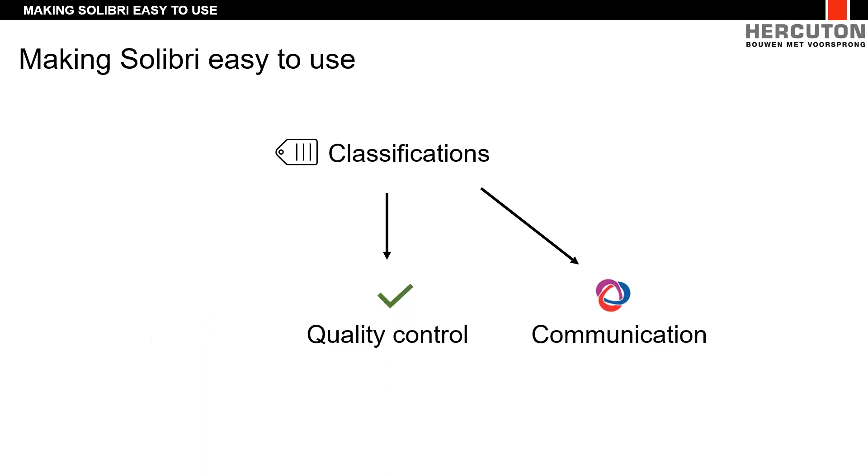We do that through classifications. Classifications is our starting point always. To get information, to do quality control, and to communicate. Classifications is where we always start. Today we'll focus on quality control and communication. And so with quality control, how we set that up in our company, we have a rule set per building aspect or discipline, if you will. The classifications are the base of all the rules. Again, the classifications is where we always start.

So we check procedure, the quality of the data, the difference of production and design models. And this is a very important thing in our company as well. We're talking about design models and we're talking about production models. There's a big difference there, obviously. Check the model itself on specific quality demands from our side, and then check the model or clash the model with other models. That's our procedure. We're going to show that later on in the demo.

And we're going to talk about communication today. We use a live connector to connect to BIMsync. BIMsync is our online platform, our CDE, Common Data Environment, that we use to share all our data. It could be any other platform. We use the buildingSMART BCF communication standard. This is something that me and a couple of other guys here in the Netherlands worked on, and it has been adopted by buildingSMART International. We're going to go to that later on as well. It's a sort of a manual.

I'll show you later. We communicate per building aspect per discipline. We create issues directly from checking results. That will save a lot of time, and the quality of those communications will rapidly increase by doing that. I will show you that as well. And afterwards, you can create other issues manually. This is the BCF chart. We can now go to the live demo. I promise I will do this quickly, and I think I flew by doing this presentation.

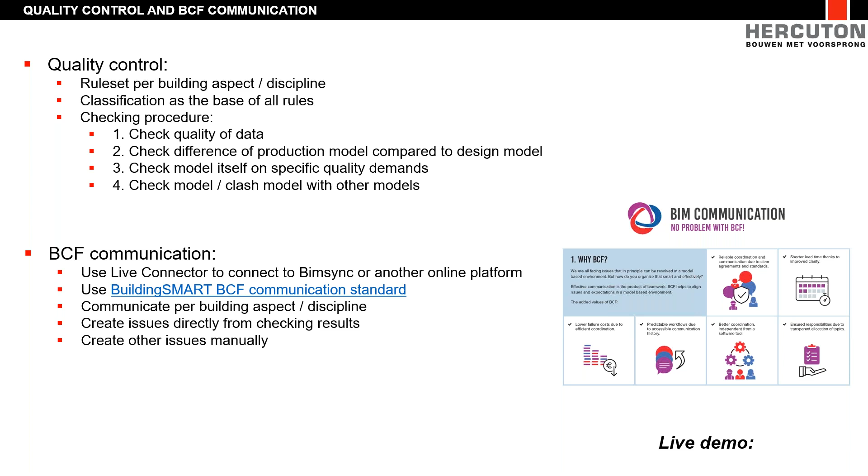Are your rule sets based off BIM basis, ILS? Good question. Yes, I will show you that. All right, let's go to the live demo so I can actually show you what we are doing. I assume that you all see Solibri right now.

Yes, it's okay. You're seeing this, Maya, as well? There are more questions. Yes. Okay, now I see that.

Are there other rule sets you use to detect the difference between production and design models, I assume? Yes, I will show you as well. I have this, and this I'll show you in the demo. Also, what is the production model? That's a good question.

So how we look at the construction or the engineering process is, in the beginning we have a design, and that's our design model. It could be an architectural model or a structural model made by your structural engineer, and that's the basis of your design. Later on, when the design is approved by the client, we go to our suppliers, and they supply us a production model, which is the production of a steel structure or a prefab concrete, those kind of things. So that's the difference between a design model and a production model.

Design models we do ourselves internally because we have architects and engineers. We design a building. Production models are created by manufacturers. I hope that is clear. And I will show you later on how we compare those two models. We've answered most of the questions. There's one, but we can also answer later.

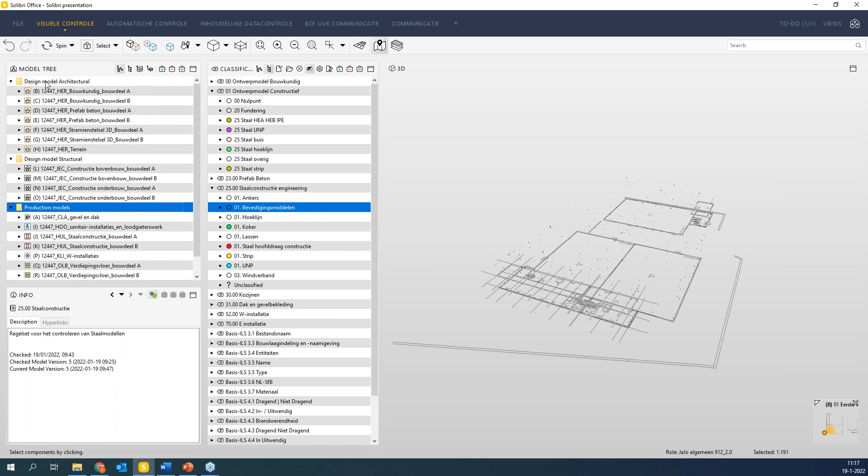Great. So I talked just now about design models and production models. In Solibri, we put those in categories, so we can switch them on separately, and that saves us some time. In our company, this is how we always work. We have our design models and our production models separately. It's very important.

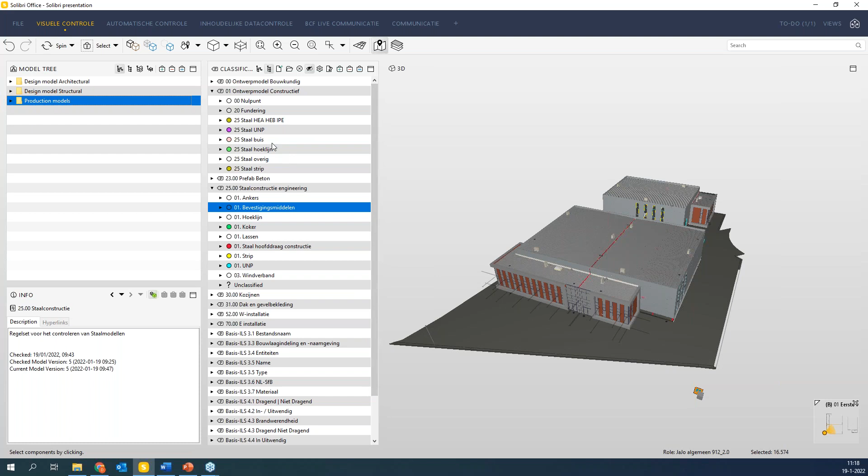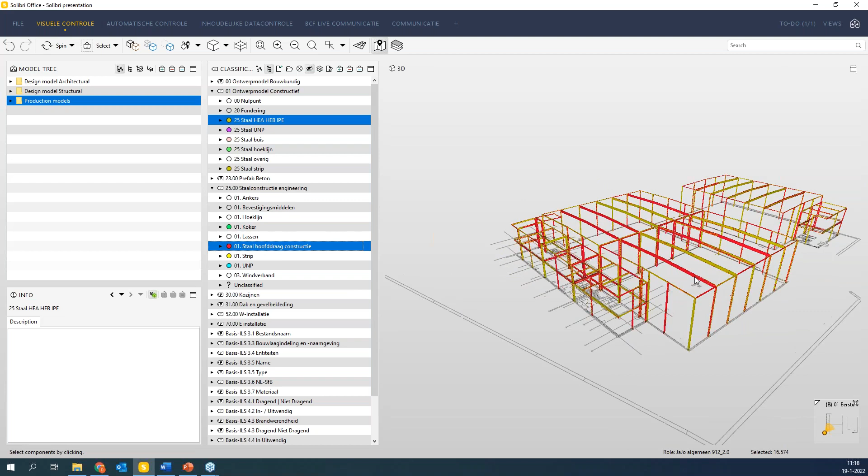Then again, like I showed in my presentation, we're talking about classification. Classification is the base for all our rules. By using the classification, you can already do some checking manually. Sorry for this being Dutch, I cannot change this right now. So it says here design model structural. I can have my main steel structure here. And this says steel structure engineering, so these are production models. I can also set that up to show those same. So now I can manually see if it's going okay or not. Later on, I'll show you the rule sets, obviously. So this is how we use the classification.

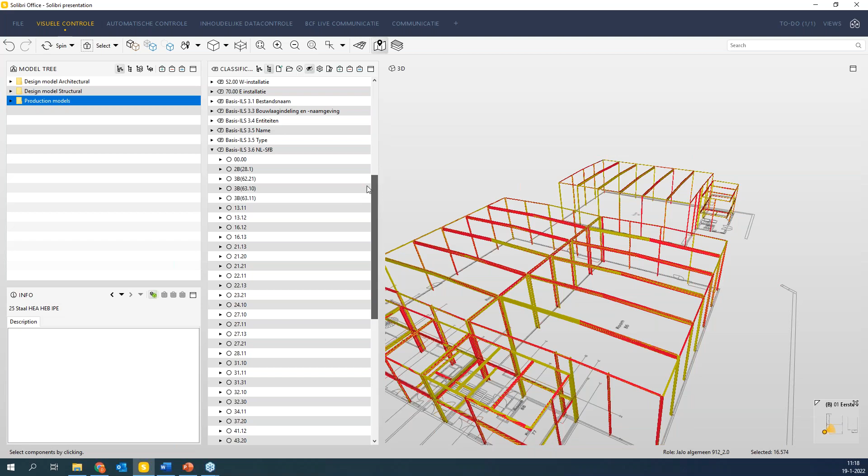Somebody asked me about the basis ILS. You see that over here. We can check our models within the classification to see if these models are approved. And already I can tell you they're not, because this data isn't properly done. You can check out the material. This looks like a little bit of a mess as well, and sometimes they apply the rules, and sometimes it's just difficult. And honestly, it is really difficult to comply with the basis ILS all of the time.

That's mostly on the production side, because some production companies have set up their whole BIM idea to literally produce steel or prefab concrete, and they're not so interested in whether the data is correctly done, which is obviously a little bit of a shame, but that's how it is. And we see that by helping them, they will get better and better. All right.

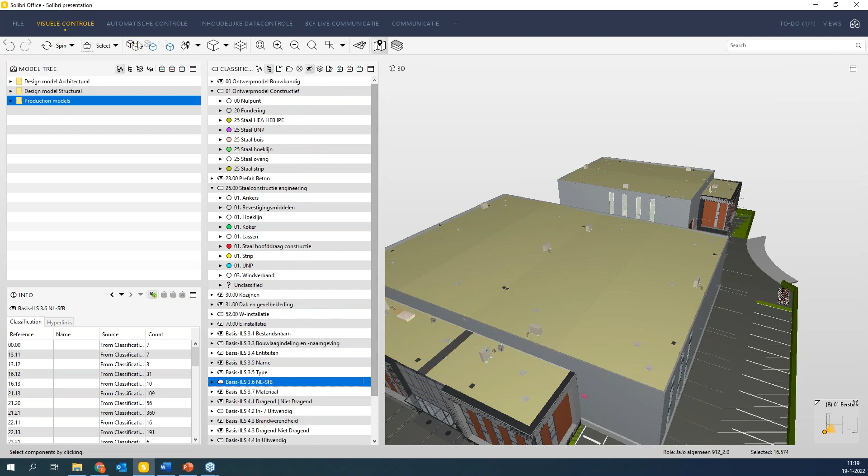Automatische controle, that's Dutch for automatic checks. This is where we are doing our rule sets. So let's go to the rule sets. I already set up a project here. It's a relatively small project for us, but it's good to have some control. As you see, I have some views ready here. These are saved for our entire company. Of the model tree here, and of course our most important ones, the classifications, where we can play around with.

And these are the rule sets. These are only some of our rule sets; we have a lot more. And as I promised in the presentation, these are set up by discipline. This is prefab concrete, and this is steel structure in English. I just decided for this demo to use the steel structure. As I showed you in the presentation, we're talking about the basis ILS. This is the basic data check. Then we will check the differences.

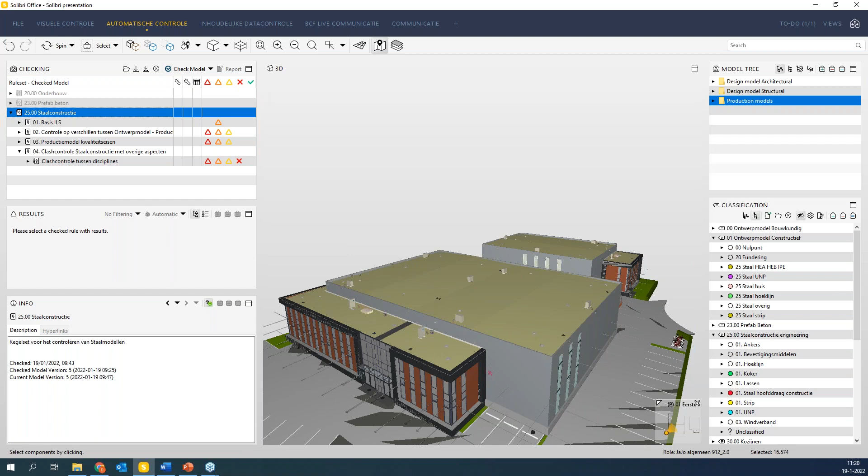Let me translate that in English for you and show you what it says. So, checked on differences between a design model and production models. We will do that as well. Production models, what are the quality assurance? What do we ask from our production models? What do we need? And lastly, we check the steel structure with other disciplines. So our engineering department is asked to do this one by one. And let me go through them a little bit.

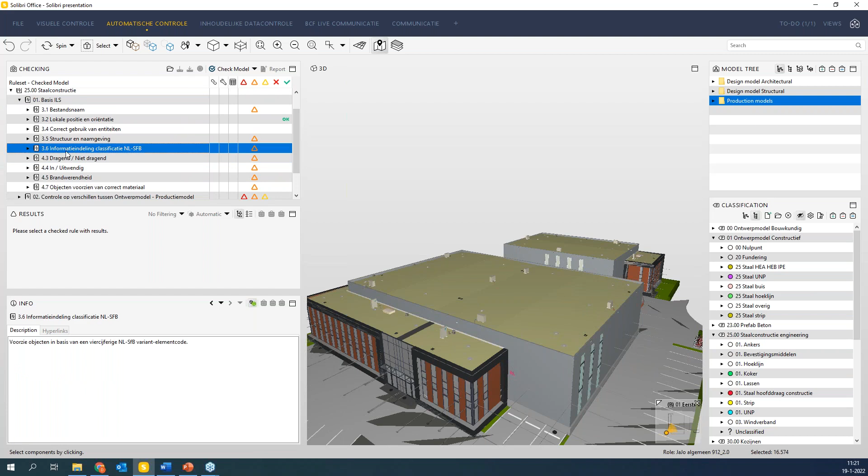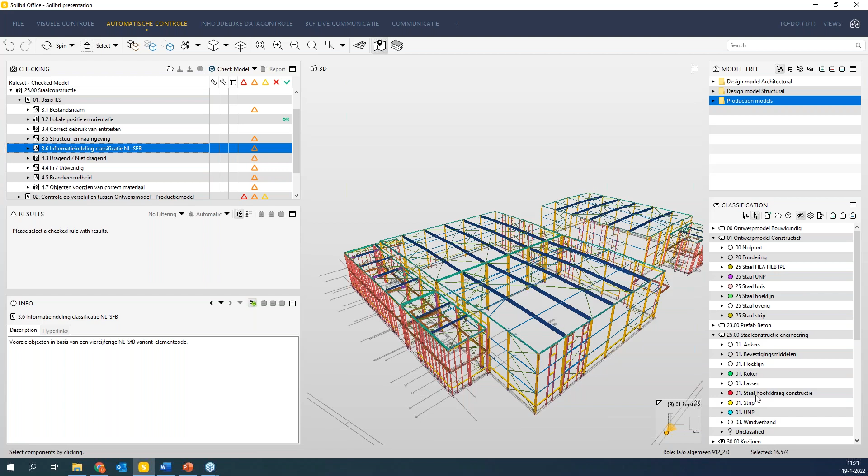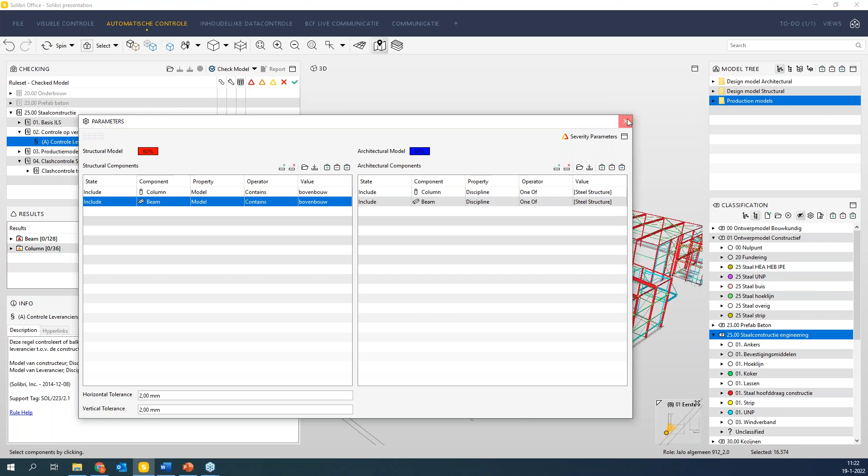All right, one of the questions was design models and production models. How do you guys check that? Well, we created a rule set which checks the differences between the suppliers and what we do as our design company. So this rule set, I can check it here. It checks out the differences between them. Again, you can see here. So I can show you some results. Actually, let me show you the columns. There's a lot of differences in the columns.

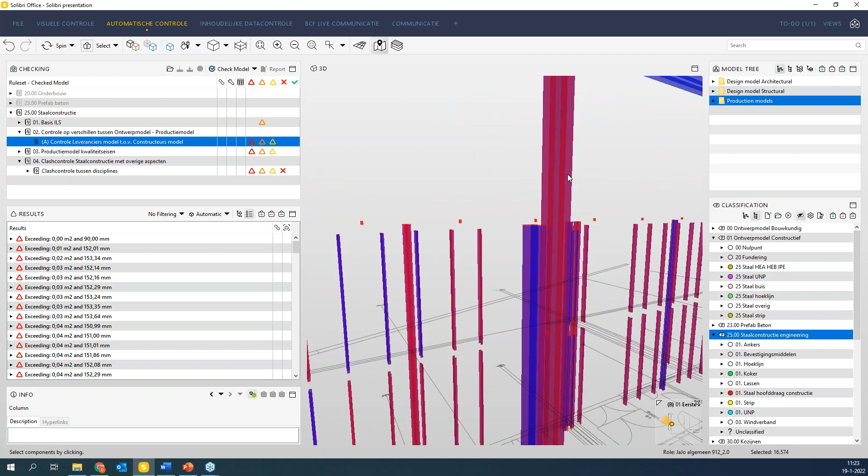I can go by that manually, or I can exclude it. There are more options for doing this in Solibri. You can check out this option, the switch to hierarchy list, because this will show me the results directly. And by doing this, I can judge myself how bad this issue really is. And I can also use a filter, because, for instance, this is not really a large building, but if I feel that it is, I can create a section plane here. And now only this part is showing.

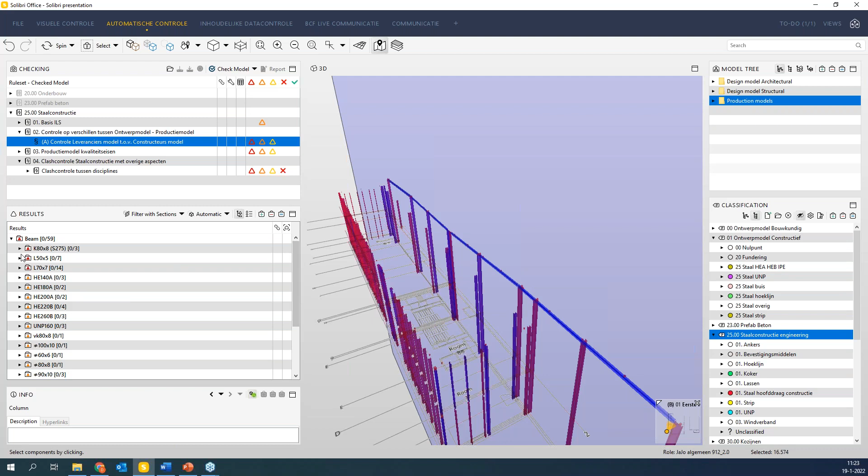Let me go back to this one so you guys can see. You can see the amount here, 128 and 36. But if I use the filter option right there with my sections, it's now 59 and 26. So now my results are a lot less, and I can just check this part, for instance, if this part is crucial, and we'll do the rest later. And so apparently there are some deviations here.

I don't really have to scroll, I can just click on it and I will see the deviation. Now I don't really know what we're talking about here. So again, I'll use my classification, steel structure engineering. I'll add this. There you go, and now I know what they're talking about. It's a bracing. The designer placed the bracing at some point, and the production company moved it a little bit. Well, to me, this is not a problem, so it's okay. So this is how we use the quality check. We check them one by one, and when there is an issue, we'll communicate later on.

Let me see what I was going to do. Difficult.

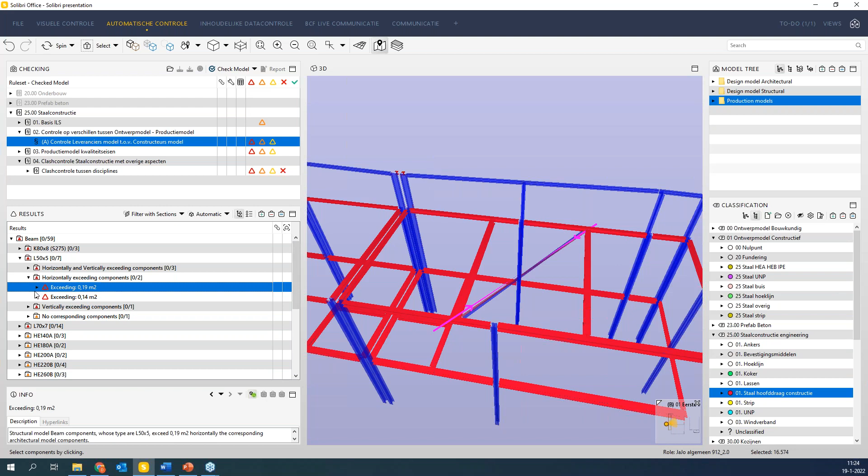All right. So this is how we can just go through it. It looks like a mess, but again, I don't know how many people have experience with these kind of steel structures. The difference between the production model and the design model is literally a couple of centimeters, and this is where the production company adds their plates. I can show you here.

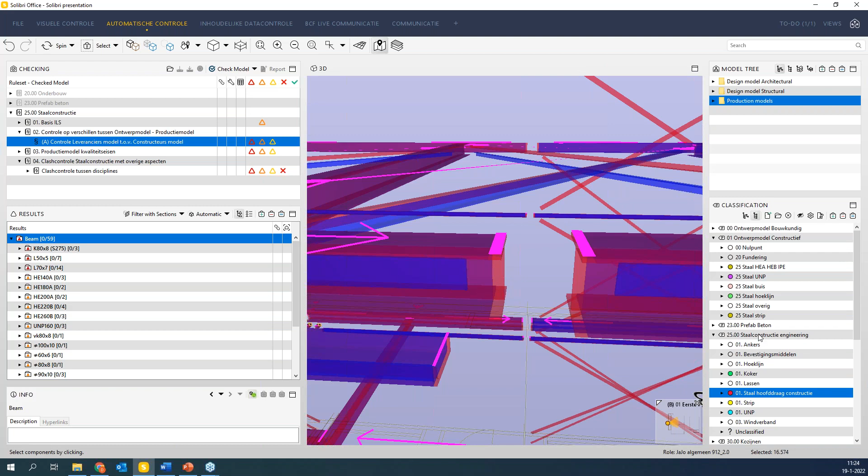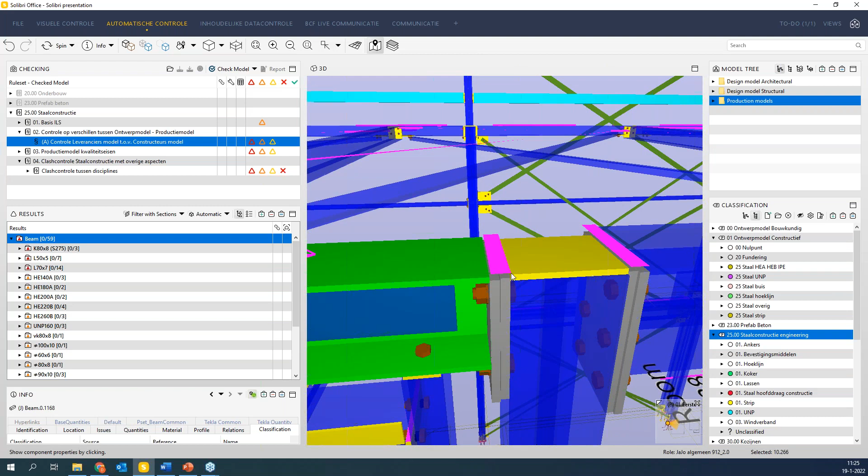So the difference is that these beams are all smaller than the designer created because these plates are added. And you can still see here the pink rectangle that Solibri tells me, hey, wait a minute, this beam is now shortened by this length. Well, that is true, and that's great because that's exactly what we need. So that means that sometimes it could be a false positive checking these things, but because I know how this works, I'm okay with it.

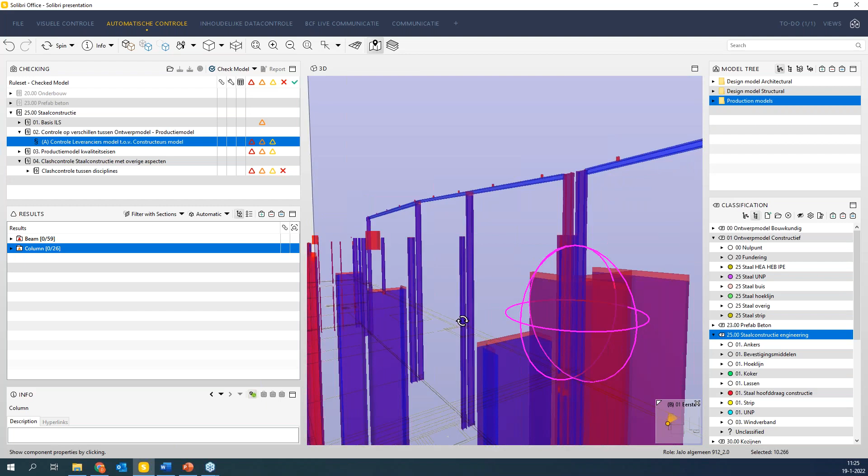So I'm generally looking for columns. Again, they have the same thing. You see the small differences. Looking for columns that are moved horizontally. Because if they're moved horizontally, then that means that our production company somehow decided that this column needs to be placed somewhere else, and that's obviously unacceptable.

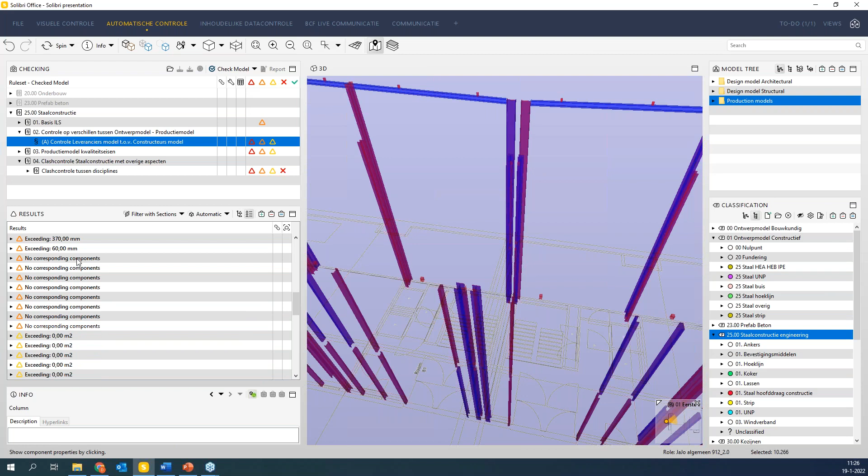So I can do that, and you can check if it's exceeding or it's no corresponding components. That is interesting. So that means that the production company added steel without designing them. All right, so let me select them all. What's going on? All right, so that's wind bracings. So they've added wind bracings. That is something interesting for me to know. And these are exceeding very low values. So I'll generally just check the high values exceeding 2.5 meters.

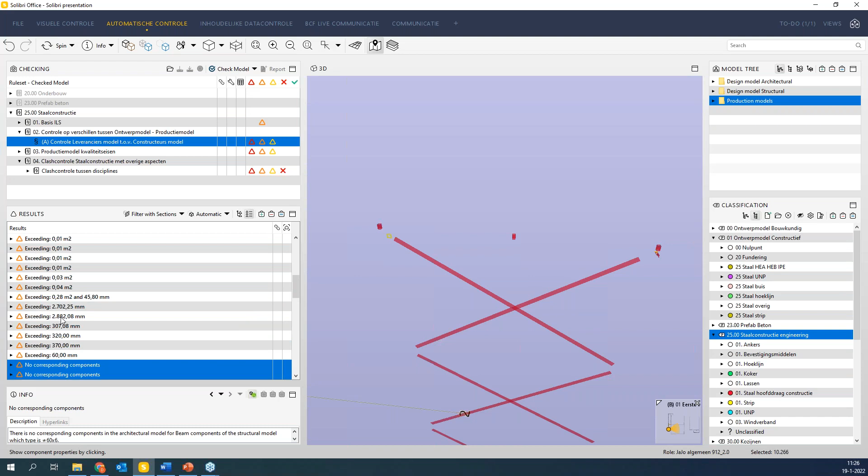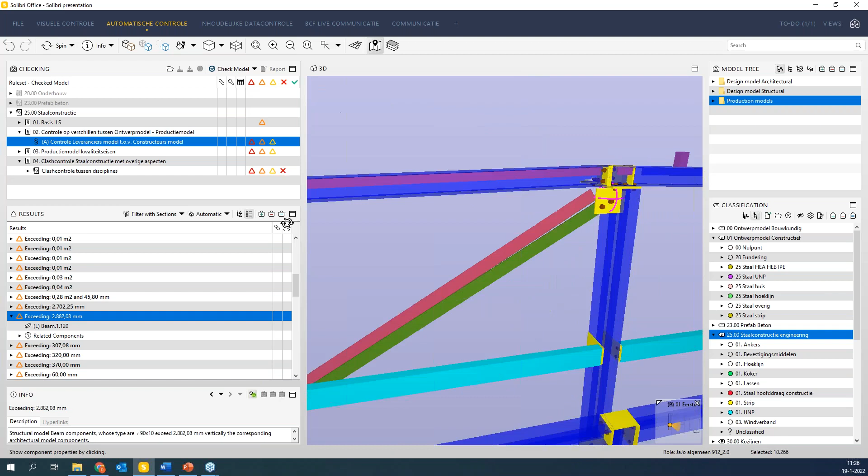That's very interesting. What's going on over here? Let me just add the steel structure again so I know what we're talking about. Yeah, I don't know why it's happening here, but it's good. It's telling me this. This again, it's the same thing. The red is the designer, the green is the production model, and this looks great to me. This is not a problem. But it still is good to check because you never know what is a problem. So Solibri is helping us a lot, getting us insight into this process using the steel structure checking.

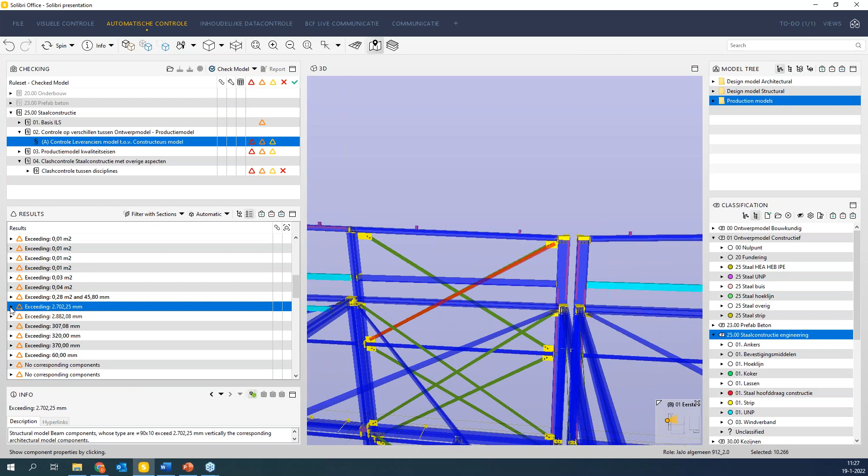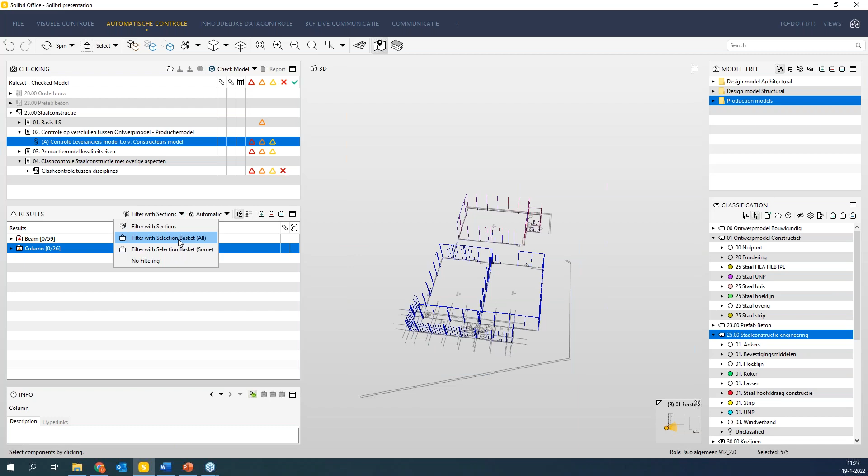And here is the same. It's the same thing. So again, this helps us out. I think it's interesting to use either the beam and the columns checks, and use your filters with the section. You can also use filter with a selection. You can just go select and throw a window here, and then say filter with selection basket, and you'll see the numbers change as well there. And we're just talking about these columns or all the columns. So yeah, that's an easy way to minimize your filters to check out what you're doing.

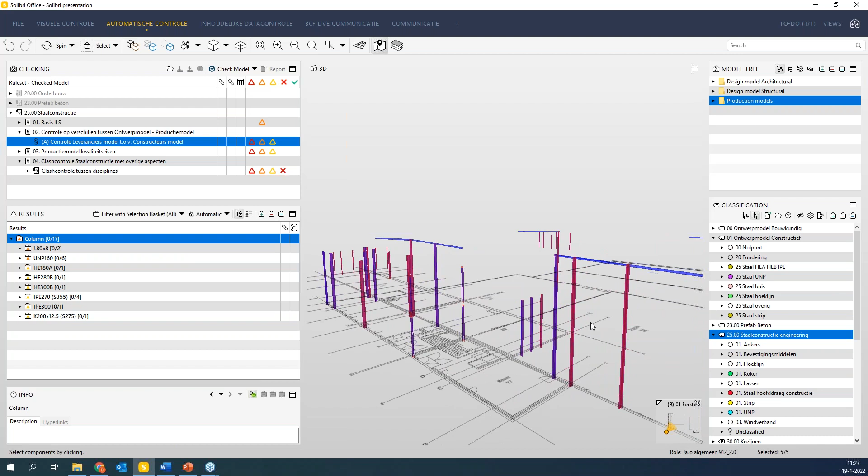Okay, let's move on. So our production model, our own demands. What are we asking for this model? So what we did is within our company, we asked our specialists, when you're checking a steel structure, what are you checking? So we wrote those questions down, and those questions are now part of this list. And you see there's an A or an H behind it. Well, A is Dutch for automatic, and H is Dutch for manual. So there's automated checks and there's some manual checks which cannot be automated.

So what this helps our engineering department is we've created a checklist of what they have to check when a steel structure model is being sent to them. So this is company-wide. You don't have to do this manually every time. Our whole company uses the same rule sets. So for instance, let me take a couple of seconds, like here, this one. This says the bolts need to be in entire centimeters, so you can't have half centimeters length. All results are filtered out. Wait, let me check the model again.

Where are my results? Oh sorry, I've used filters. That doesn't work, obviously. So no filter.

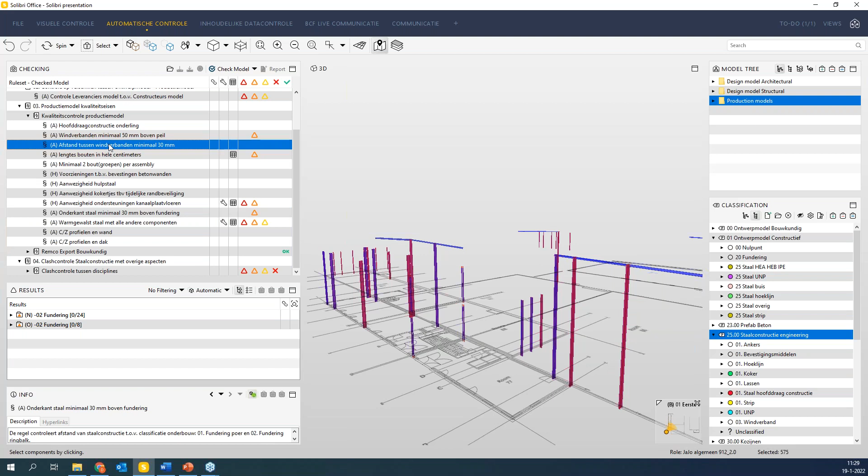There you go. Like the bolts, for instance, it's saying all these bolts have a length of 35, 45, and 55 millimeters. So our engineering department will change that to 40, 50, 60, and 70, because we don't want these half-size bolts for some reason. It's not up to me, it's up to them.

So what we can show you here is that Solibri is not just about clashing, it's also about quality assurance. We want other types of bolts, we can check that.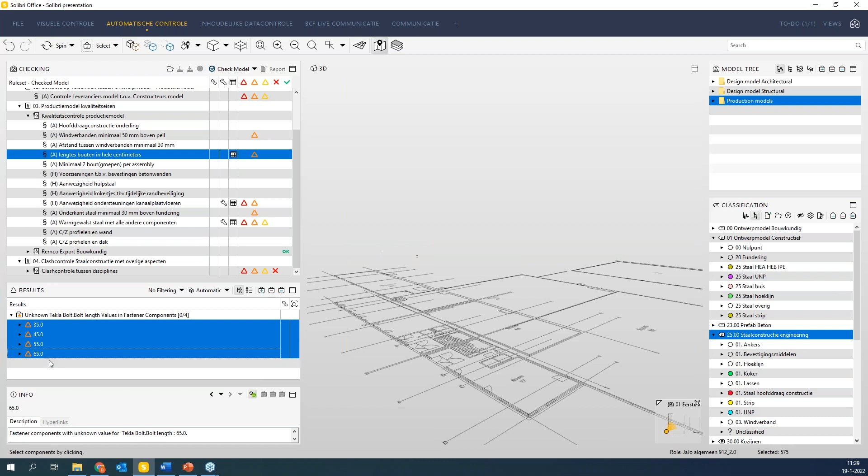This one, for instance, checks that the bottom of the steel needs to be at least 30 millimeters above the foundation. All right, so what's going on? Show me the results. Components are too close. Okay, what are you talking about?

Let me show you. Okay, these are some assemblies, some fasteners. Let me show you how we can fix that. This is a small error in the rule set, so we just change that.

Let me undock the information here first. So this is the information about the fastener. Again, I'll go to classification straight away because I want to exclude them using classifications. We always use classifications. This is the classification steel structure engineering, and this is the folder it's held in.

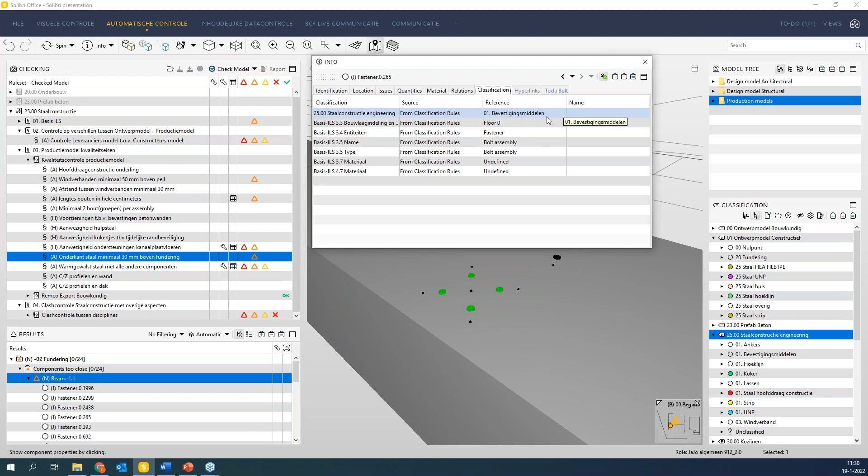So I will exclude that classification. How do I do that? Right click, rule parameter. Here there's already some things excluded, the anchors are excluded. I will double click here, and also add this one.

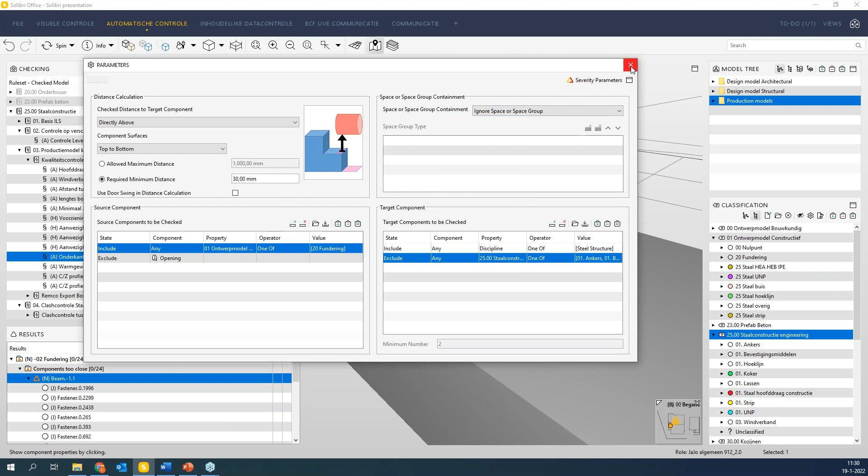It's now also excluded. Close it, check model again. There you go, it's not checking it. It's now completely okay, so we have no more issues. All steel structure is at least 30 millimeters above the foundation, which is perfect.

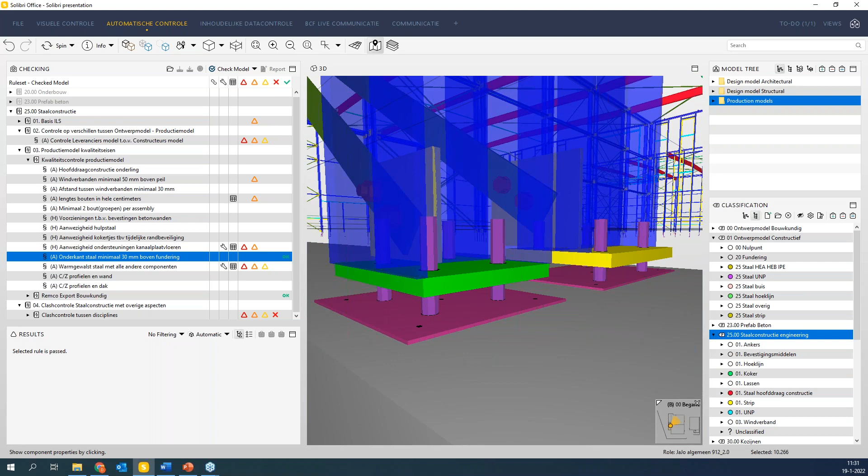And there you go, because I've already excluded these things, the anchors and the assemblies. So the bottom of these plates are now 30 millimeters above my foundation. That's how we use quality assurance for these kinds of things, and I think that's a rather good thing to do.

What else can I show you in here? Let me go on to the next one.

So here we have our clash control with other disciplines so far. Maybe before I move on, are there any questions before I move on? Maya?

Yes, we have received some questions, but I think they can wait until the end, or would you like to answer them right away?

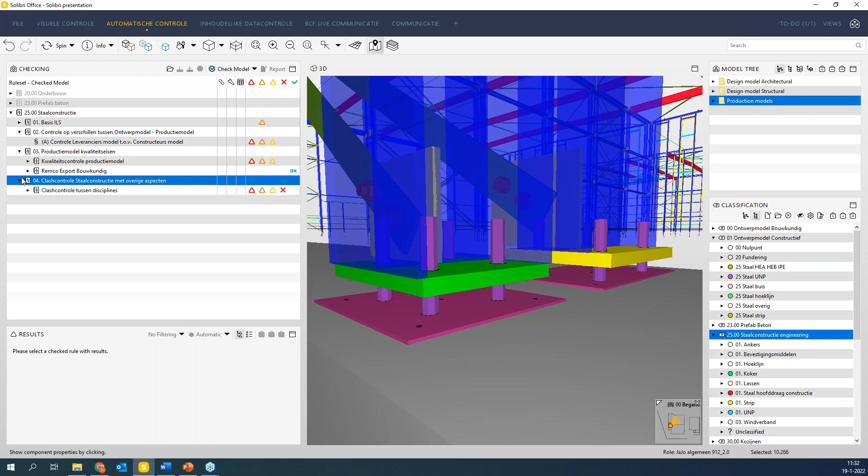Well, if I'm going to, I can do one more. I can just do our final piece, clash control with different disciplines. Let me just do this. I'll finish this up, and I will answer some questions and show them directly.

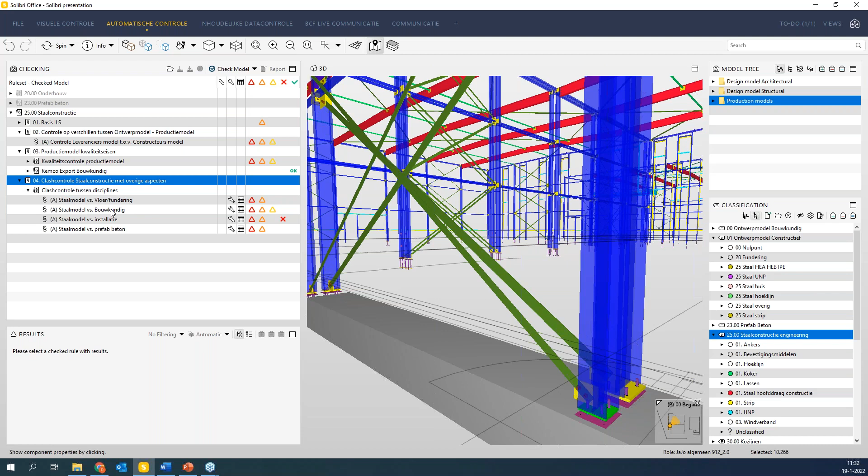So what we do here, I'm in the mode of checking the steel structure, so you see that here as well. We've created some standard rule sets. It says the steel model will be checked against the foundation, against the architectural model, our MEP, and our prefab concrete.

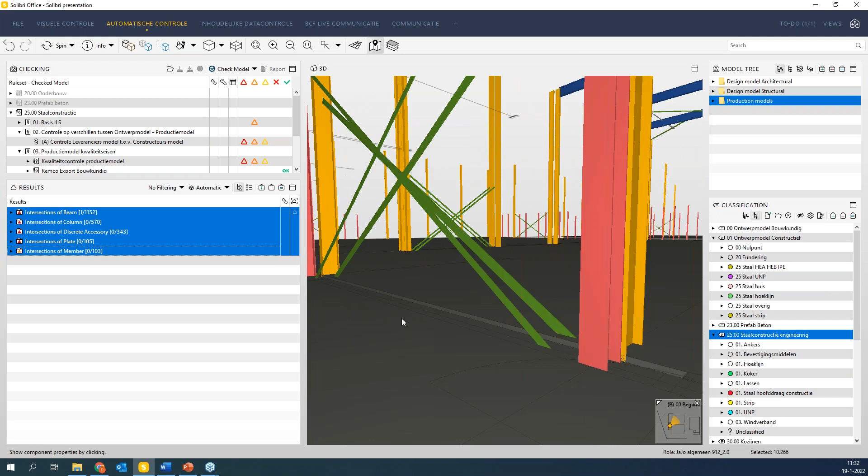All right, so show me the MEP, and I will then move this up so I can have better results. There you go, it's up a little bit. So there's a lot of clashes between steel structure and MEP.

And again, you can see, well, these are all the clashes, but let me keep it simple. What's interacting between the beams? What we always do is create an overview first to see how bad it is, because a list of 1152 seems awfully large for such a small project. But if I look at it like this, I have an overview, like all right, it's not that bad. It's going to give me a couple of clashes, and it's not going to be that bad.

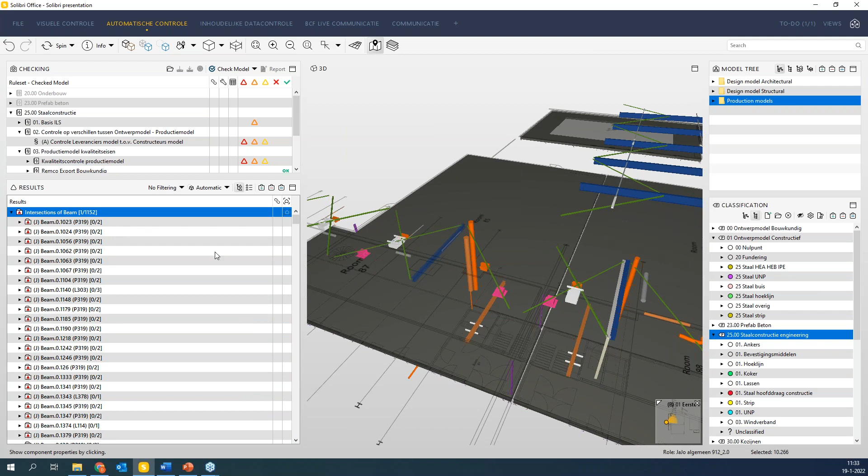So what happens here? I can either go through all these 1100 issues, but I don't want to. I'm relatively lazy, I suppose. So you could also do this semi-manually by just going through the model and seeing what's going wrong, and the rule set already helps you by finding out these kinds of things.

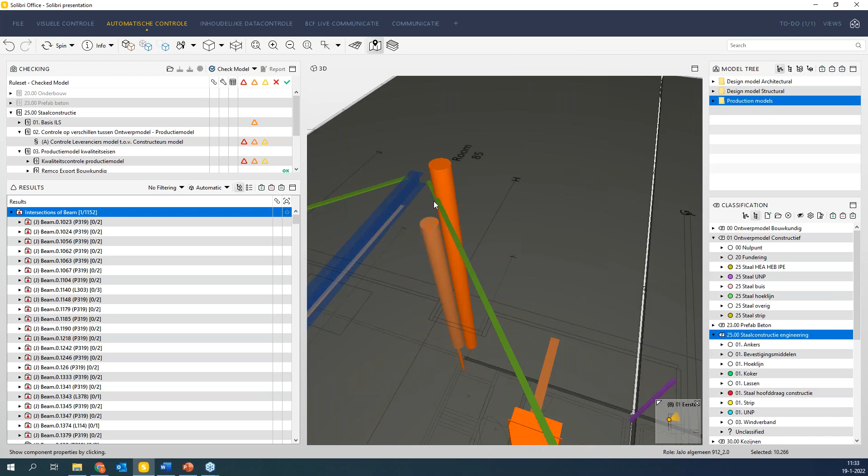So, like for instance, this one, this pipe goes through this wind bracing, and that's not possible. So I can do that. I can do it in two ways.

This might be an interesting trick for you guys. I can click on that object, and there you have it, it now has a little tab that says issues. So this tab is now filled with issues, results of all the rule sets I've run, where it is at fault, if you will.

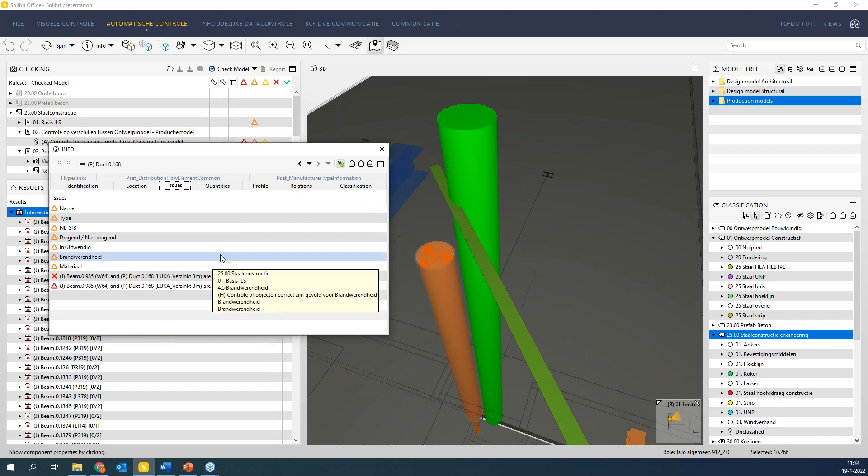And well, one of them you see right here, this is where I'm looking right now. So I can click on that issue, and that's right there.

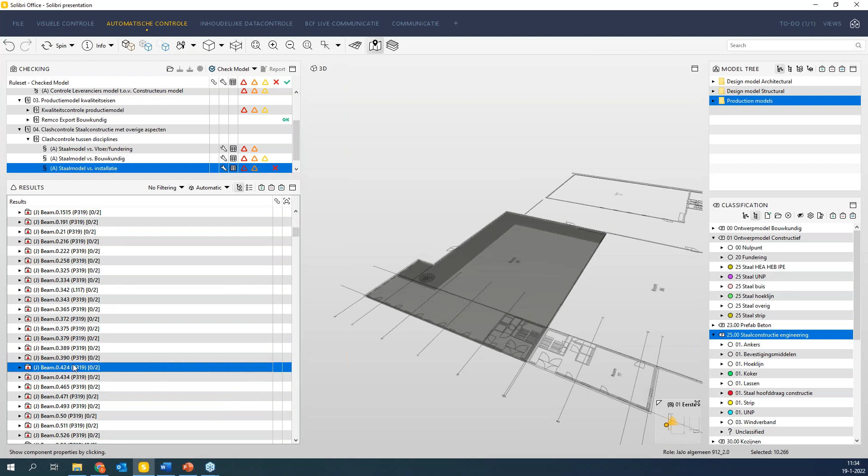So this issue is now right here. Again, I could have gone through all of these. I can click on them, and it says this floor is interacting with some MEPs, whatever. But I'm not really interested in that. See, it's just too much for me. I could also have excluded the floor, honestly. But to me, that's not interesting.

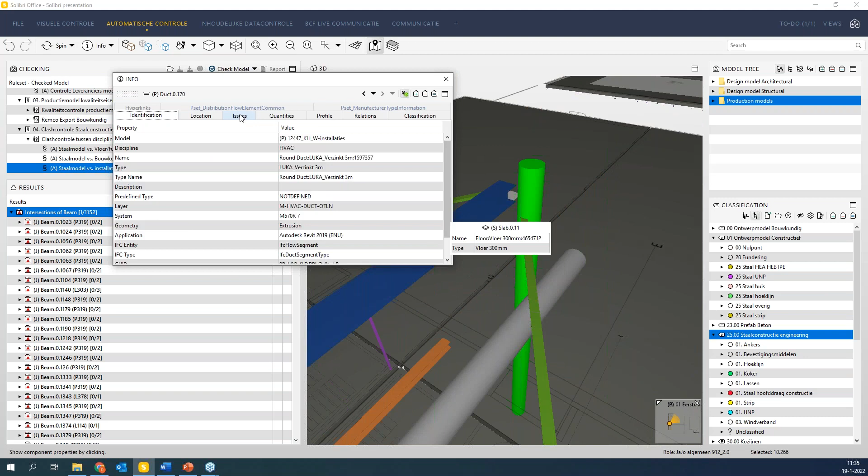And this gets to the good part, and I just want to check these kind of things. Again, I can also go back and exclude the floor, which is actually weird that it's in there. Or I can just do this manually. And right now, I chose to do this manually. I will go to this beam. I will actually do another one because I already did this one. So I will go here. I will go to this, click on this, check the issues, go to that one.

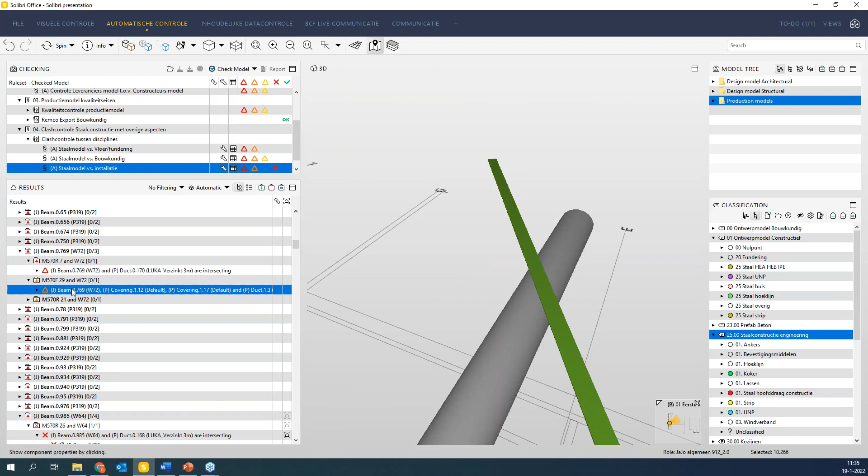So this is my issue. And this leads us right into the communication, really, because from creating issues through the rule sets, you go right to the BCF communication. Apparently, there are a couple of similar ones because they're all folded on this one. So that's really helpful for Solibri categorizing the issues.

So what they're saying is that this beam, and you see that over here, beam 0.769, that's this one. It says here W72, and you can see that over there as well. So that's the link. They're telling me that W72 is interacting with a couple of things from the MEP. Well, so that's quite helpful.

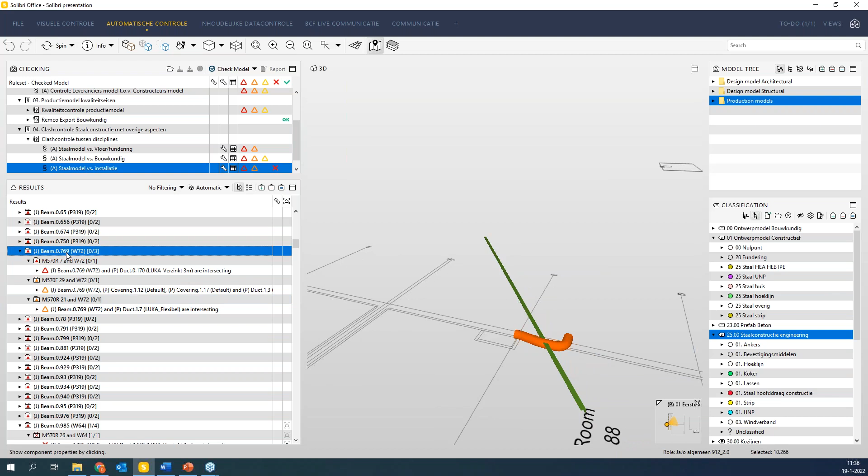So I can either make one issue of all this, or I can make one of this, and another one, I guess, and there you have another one. So it's just whatever way you want to do it. It doesn't really matter. So let me just keep it small. Let me just tell you this is the problem for now. They have to move the duct; the duct has to move here.

So I will create an issue. I will double click there, and an issue has now been set up for me. And this is where I think I will hold on here, Maya, because this is where we go into BCF communication. That's a part of the next chapter. Are there any questions regarding the rule sets that I quickly need to answer before I go into BCF communication? Because that's when we start now.

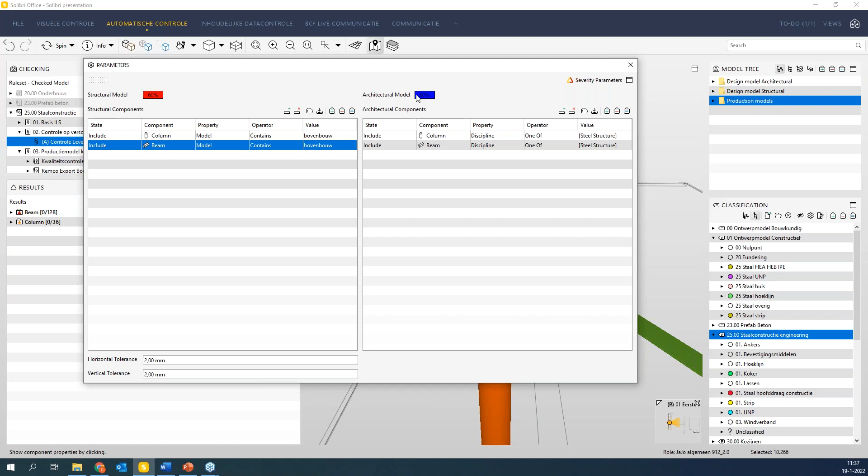Yes, actually, there are a couple of questions regarding what kind of rules do you use for 04 and for 02? Honestly, let me see, I'm not sure which rule this really literally is, but it's checking. Maybe Laurie, you can help us with this. I'm not entirely sure, I could actually go and find out here. I wasn't prepared for that one, but that's okay.

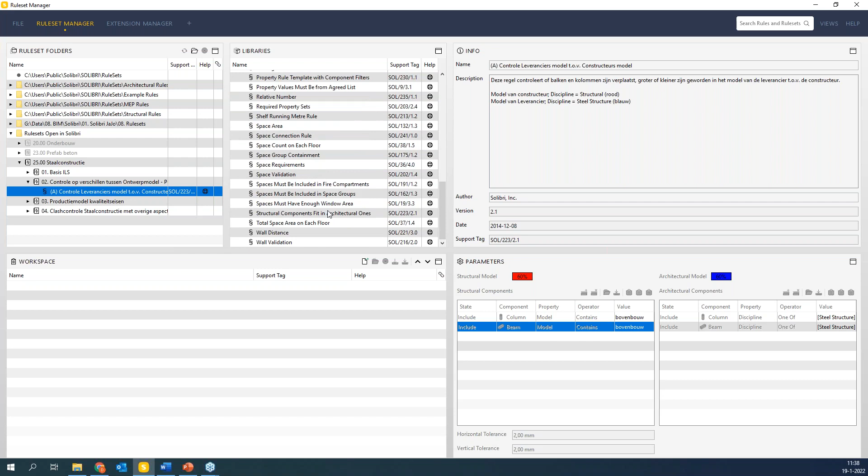So rule sets open in Solibri, steel structure. This is 2. So that is rule number, there it is. So it's 223. That's a needle in a haystack, isn't it? There you go. So structural components fit in architectural ones, that's the one we use for that. So it checks the architectural model and the structural model, and it's checking the differences. So that's rule 223.

And for number 4, this is a relatively easy one, because this is the standard one. This is the check, this is the clash control, which is general intersection rule. 4 is relatively easy, but we make it smart by using classifications if we want to. And I think these ones for now aren't using classifications that much, but we use classifications to exclude some things. And we can make them smarter by adding classifications.

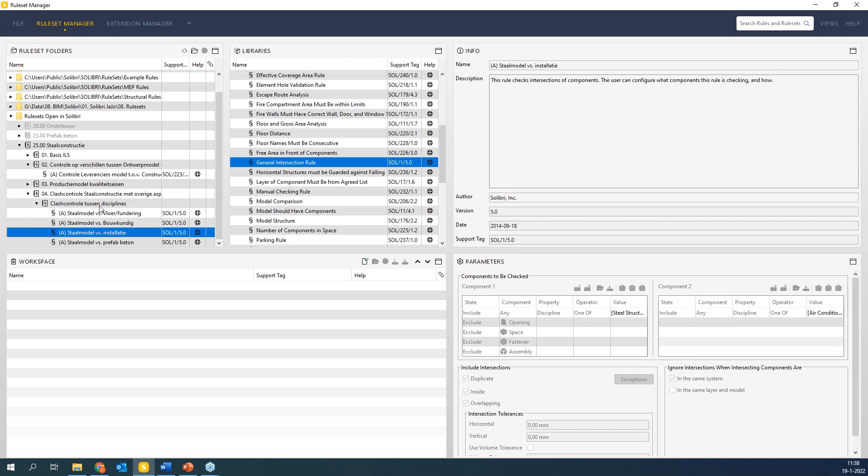Anything else? Yes, thank you. So another question is, which kind of rules do you use for, it's a different language, but I assume it's quality control product model. Yeah, that's number 3, I suppose. That's very different, that could be anything, because the one I showed you just now is like the size for the bolts.

There you go, that's 9.3.1. Let me see, there it is. So property values must be from agreed list. So what we did there is, I can actually open it. I think I can just open it. I should be able to open this.

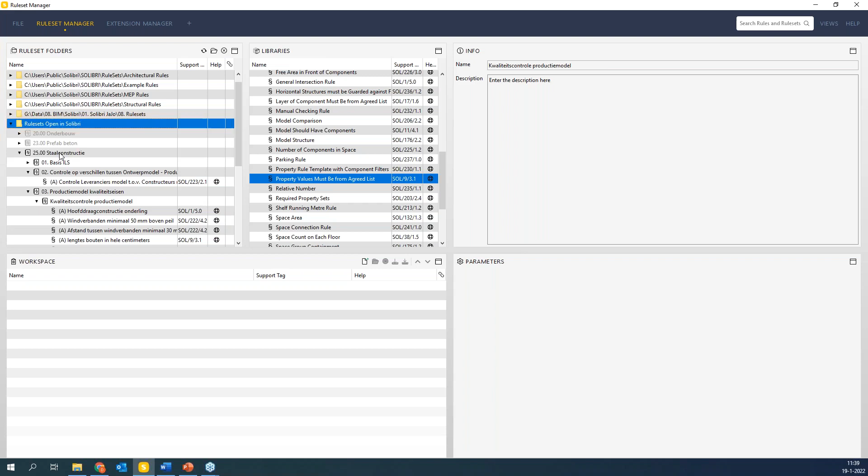Oh, okay. How come that's not? Oh, there you go. And then I'll go on to the next one. Where was it?

So what we did here is, this is pretty much what we used. So it needs to be here. What we did is we went into the parameter, which is Tekla bolt length, because technically it's almost a Tekla model. What we did here, it says that the fastener must have a value of at least anything with a 0 dot and a 0. So therefore, that can never be a 5. So that means by doing this, because this is in millimeters, it always needs to be a complete centimeter. So that's a little trick we use there.

But if anybody's interested, I'm very happy to share these rule sets with anybody, because we have no secrets, and we're just happy to help everybody out and use this.

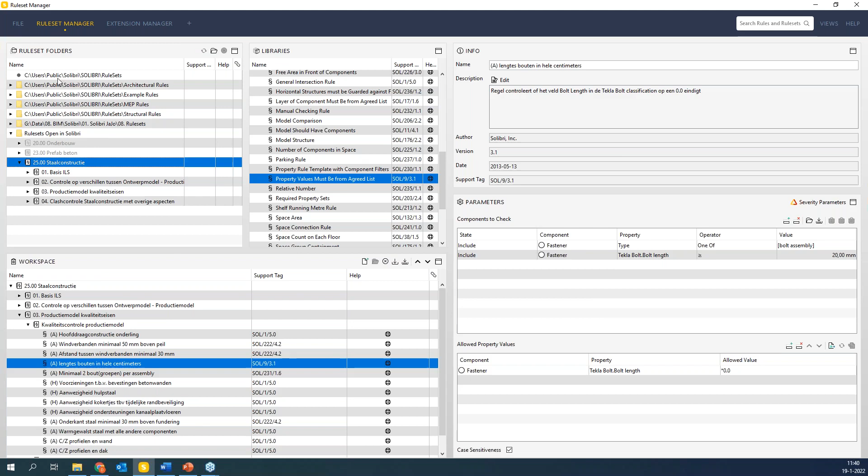Yes, actually, we had a question related to, will you be sharing it? If you share it, that would be really great. Yeah, no problem. I mean, why not? Let's everybody have fun with it.

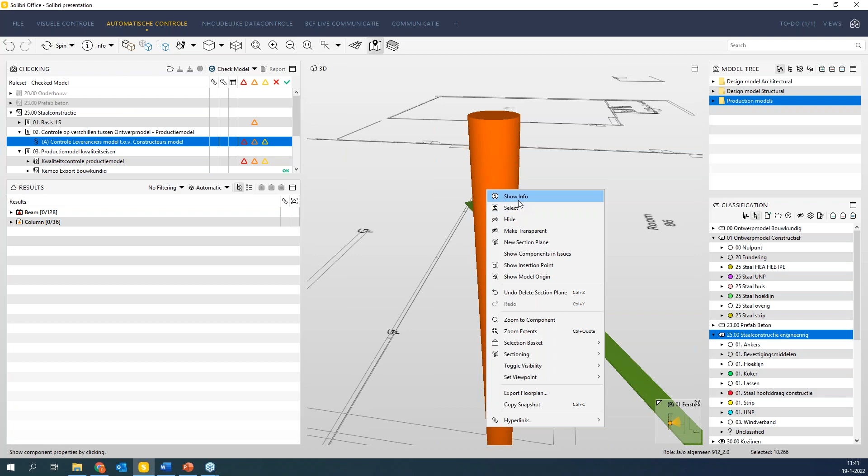Where was I? Automated control. There you go. Let me go back to the issue. I can go through the issue. There you go. So there we are. So issue.

Let me then quickly have a sidestep. I see we only have 20 minutes left, but we already did some questions. So I talked about the BIM Collaboration Format. And if you check this website, it's in our presentation.

You will receive it. You go to this link, and then there's a link to this sheet. I'm not going to go completely into this. That's maybe for something else. But what we have created, me and a couple of other guys, is a standard on how to work with BCF communication.

So why do you want to use BCF? This is for yourself and for your managers. Hey, why should we start using this? Because it's the right thing to do. It'll help you with communication because it's object-based. And that's really a much better way to communicate than emails and print screens.

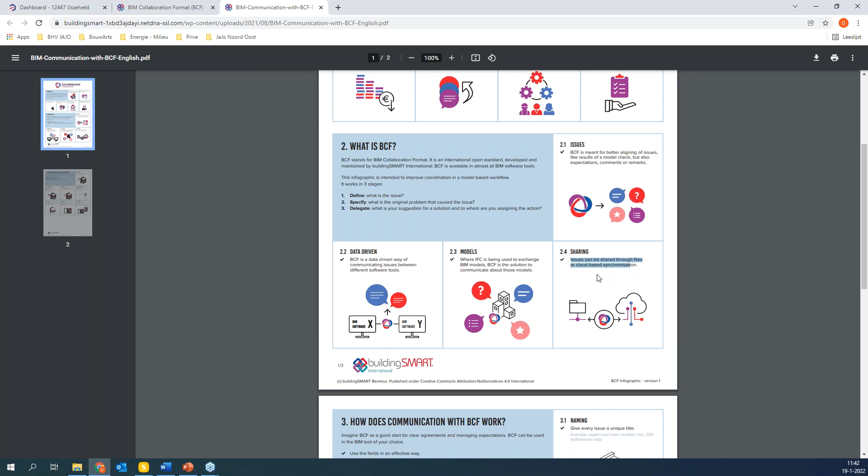What is BCF? Well, it's like communicating through models, and you can share those issues quickly, and I will show you that in a minute. And this is the sort of the manual, how does BCF work?

And what we tell people here to use as a standard is, at least use these functions in your BCF. So that's the minimum to work with. I think it'll help people out. The quality of the BCF communication will be better for sure.

So let me just, instead of looking at more manuals, let me show you how this works. And again, this link will be in the presentation, and you guys can check it out for yourself. It's now in English. It started in Dutch. It's then translated in English, and I think it's also translated in Spanish soon, and in French. And a lot of people around the world are interested in this kind of manual. So if you guys want to translate it in another language, you're very welcome to help us out.

All right, let me go back. There you go. So my issue. What we do here with the title, we want to create a unique title. Let me do it in English for you guys. So it's MEP number 100. It doesn't matter really what it is, as long as it's unique.

So the description is, let me think in English first. So it's bracing, clashing with pipe. Please move pipe around bracing. The bracing cannot be moved.

All right. So one of the other things you saw in the manual is the title, the description, and the status is very important. The status is we've assigned this issue to, this is where these assignees are. It doesn't really matter for now because this is a test. Let me just assign it to this group. The other, and we're going to leave the rest. The rest are, we feel, not the top priority.

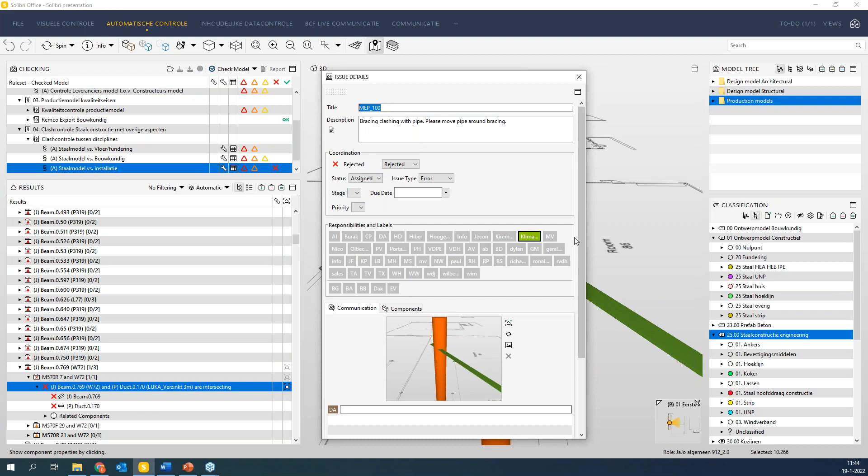So what we did is, in that manual, we'll show you at least the parts that, let's say, 99% of all the BIM software can actually work with. So that's the title, that's the description, that's the status, that's the responsibility right here. So this person or group is responsible for it, and that's the picture here. And if you decide, hey, that's not the right picture, let me change it around from this angle, I can just refresh it.

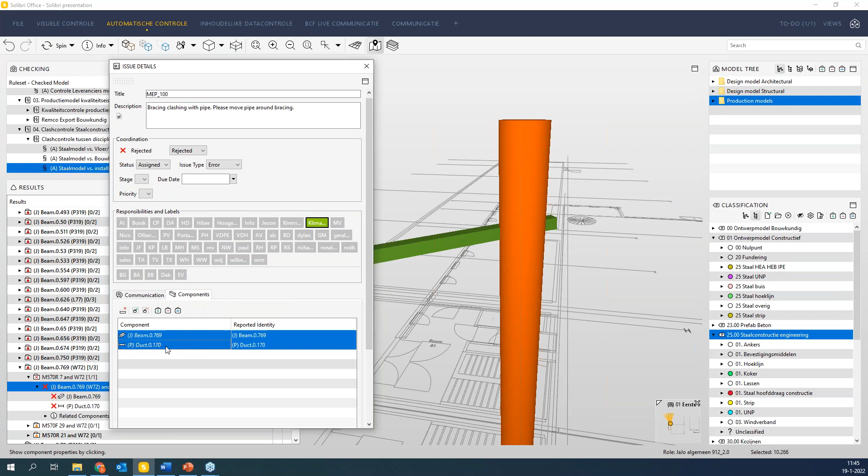There, not a problem. And the very most important thing is hidden behind components, because this is where the power of BCF is. It's adding these components by adding the GUID to it, so we know for sure what components are actually part of the problem. If you would do it differently through drawings, you would maybe draw a circle over some part of the drawings and say, hey, this beam is intersecting, change it, but you don't really know for sure if you're communicating the right way. So adding these components is the very most important thing.

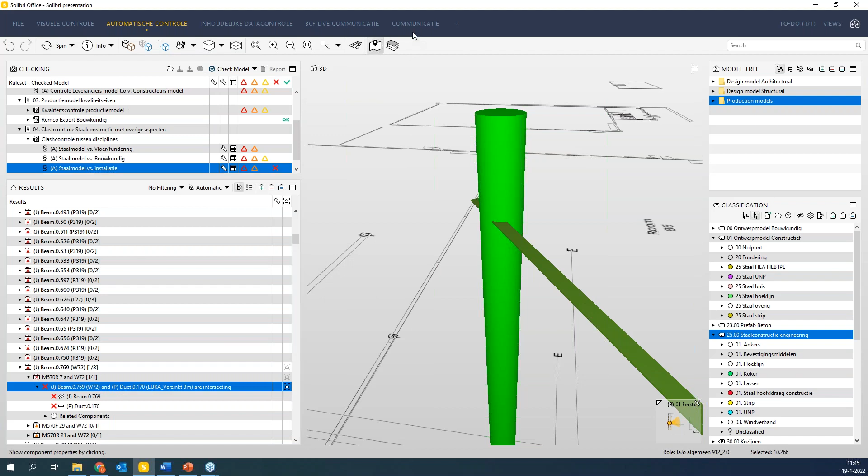I can close this. This issue has now been made. I will quickly add a new presentation. From checking results, I have 2 issues. I created one before this demo. So what we're going to do now is add those issues to our project in BIMsync. And so how do we do that? That's the new function that Solibri has been running for, I'm not entirely sure, maybe half a year or a year already. It's great. Let me show you guys what we do here.

So we're going to connect to BIMsync, and this could be anything. This could be, I think, BIMcollab or so many others. What else can you? Here, Trimble Connect, BIMsync, BIMtrack, Aconex, StreamBIM, Dalux. So there's many platforms that you guys can connect to. So this is really great. So you have a one-on-one connection, direct connection with it.

Let me just find the project that I need to connect to. I already forgot the project name. 12447. Okay. So I'm going to search through all my projects. I have a lot, I'm sorry. 12447. There we go. So I want to connect to this project, and I will synchronize some of the issues. That was a mistake. It's now synchronizing all of the issues. I should have filtered that first, but it's okay. It's relatively quick.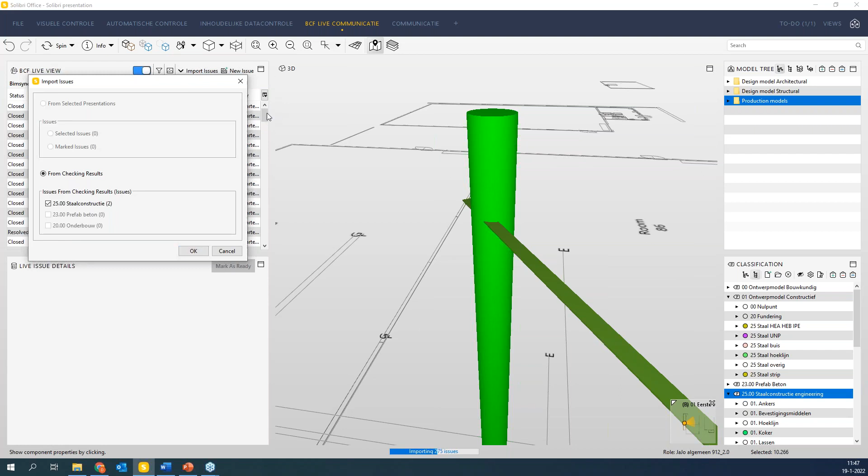All right. So what I want to do is import the issues that I've just created. I've created 2, so I will add that to the list. It's probably relatively smart for me to wait a little while before the importing is done. Again, I should have used the filter first. I thought I would have saved it because I did this before, but it's okay now. All right, so I want to add 2 more issues. There we go.

I've set that up as this button. I think that everybody should, because let me quickly show you what I'm doing here. It's now asking me, are you ready to synchronize? That's what it's telling me, and I want to do this. There is also a function that is not asking you and will upload straight away. I will advise you to take that off, because if it's synchronized, you cannot go back. And how do you change that? That is settings, BCF Live Connector. And I would advise everybody to take that off. Yeah, keep that clean there. But that's obviously up to you. Because I want to check if it's okay. Yes, it is okay. Let me synchronize.

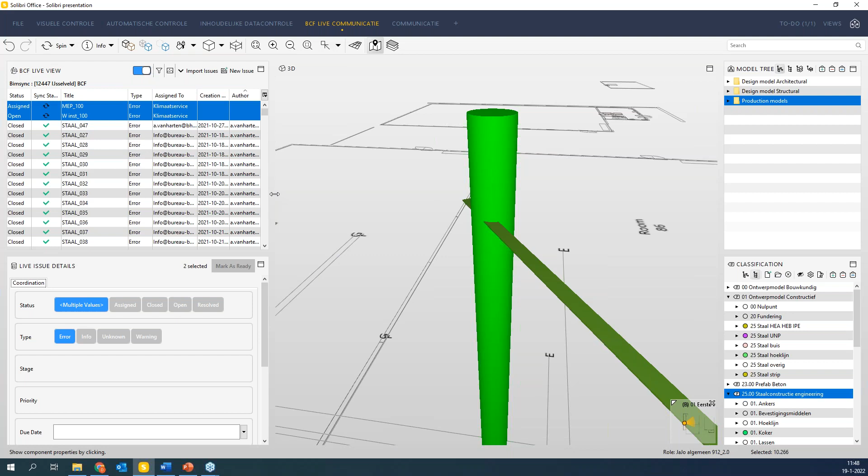So before I synchronize, let me show you guys how that works. So this is our BIMsync project, and these are our issues. And they will soon appear here if I have shared them. I will now say, yes, mark as ready. And they will be green very soon. There's a direct connection between Solibri right now and BIMsync. And there you go, that's one, and that's two. Let me go back to BIMsync. Let me give it a refresh. And there they are. So that's part of the power of the live connector. It's straight away giving your issues to another platform.

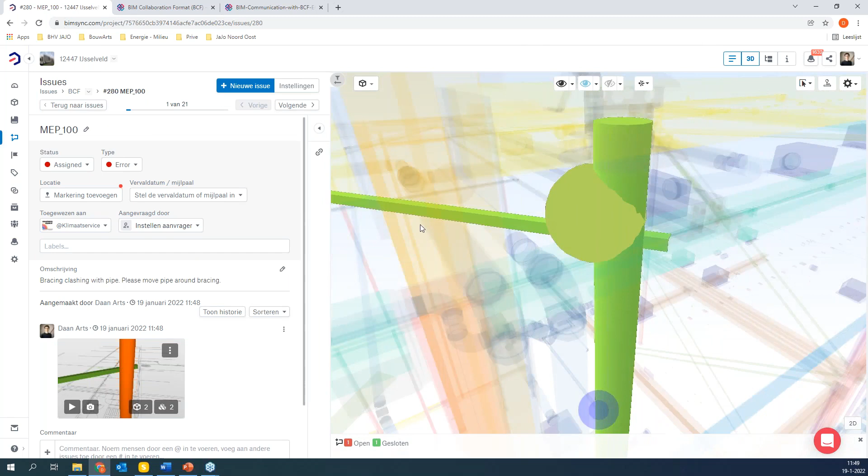And the power of BCF communication is the fact that I've created an issue in software 1, which is Solibri, and in software 2, in this case BIMsync, or it could be anything. It could be Revit, it could be Tekla, it could be whatever you guys use. If I go there, there can be no discussion of what we are talking about. We're talking about exactly this pipe and this wind bracing. There is no more miscommunication. And you can see I have attached, this is the responsibility, he's now assigned to this, and these are the two objects that are attached to it.

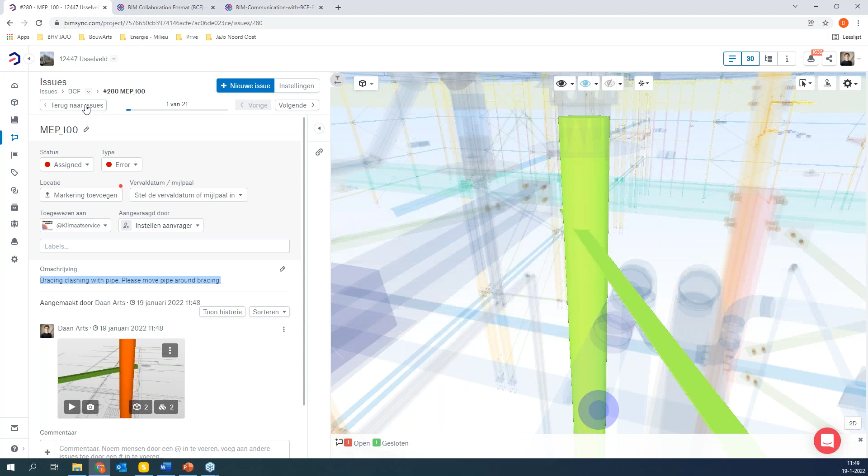This is my description. So transparent communication is gold. And this is why I believe everybody should use this, because this will help your project enormously. And what you can see here, this is not Solibri, but Solibri supports these kinds of things. Obviously, with BCF communication you can have all your issues. You can manage your issues here very well.

And again, it doesn't have to be BIMsync. It could be a lot of platforms, and this will help your projects enormously. So I really hope everybody will start using these kinds of platforms.

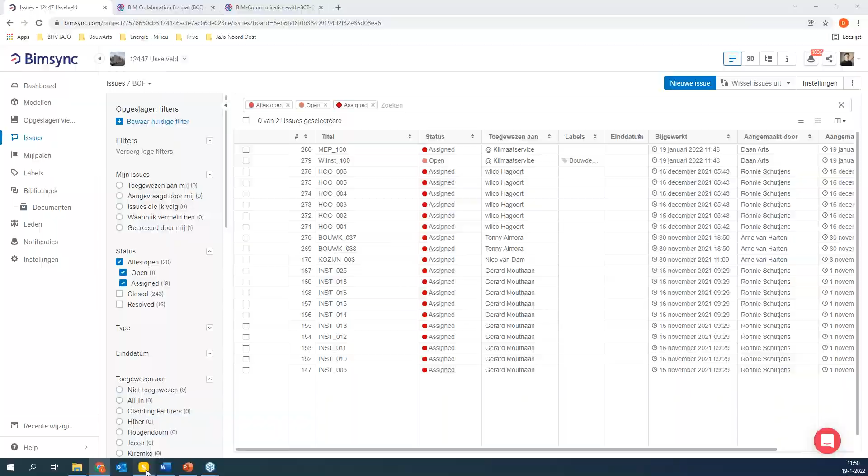Yeah, I think that's it for now. Let's do some more questions. Let me go back here. Maya? Thank you so much, Daan. We have some questions, but don't worry, if we don't answer you immediately, we will send you the answer over.

So in order to make full use of classifications throughout your organization, do you have clear information requirements for the model authors to create consistent IFC files, data types, naming, etc.? Yeah, good question. Well, the quality is technically what we call the basis ILS, or the base IDM, I think it's in English. But as I said before, for the production models, it's really hard for them.

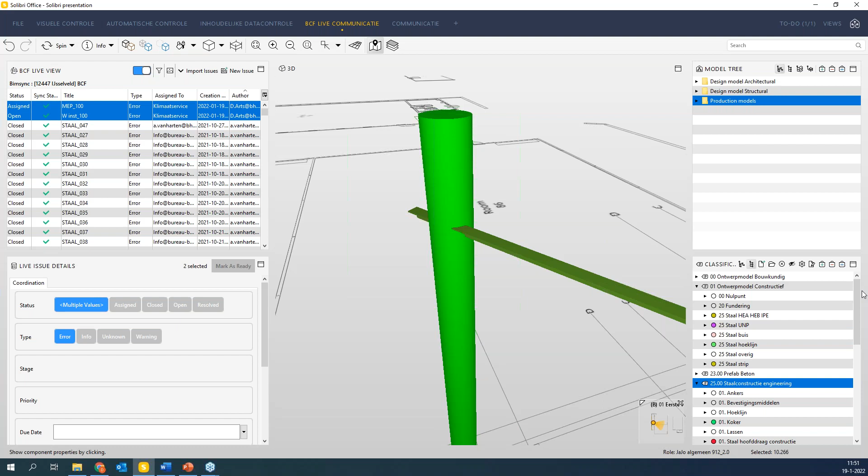And then we tell them, because we work with the same suppliers most of the time, all right, if you cannot comply with those rules, then please do what you have been doing. Even if you call your toilet a door, please continue calling it a door. At least be, how do you say that? Consequent about it. No, that's not the right word. Consistent. Thank you. At least be consistent about it. Because then whenever we receive a model from you, again, supplier, it will automatically fit right into our classification.

I can quickly show you something there. See this? Look, this is our classification, and it looks a little bit of a mess, but this is what we did, because we have multiple suppliers supplying us steel, and this is, in English, an anchor, which you mold into a foundation. Some people call it an anchor, some call it this, some call it that, and so on. So by creating a larger classification for different suppliers, you don't have to classify it every time.

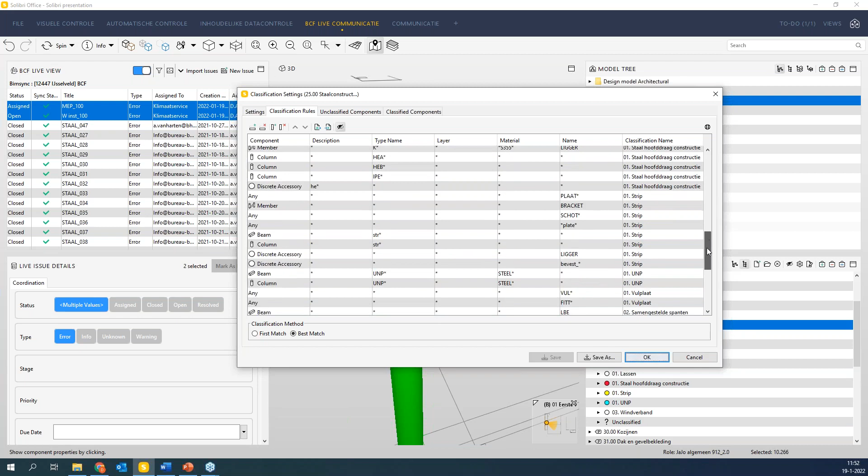Any other steel structure I import into this model will directly classify pretty much 95% straight away, because what we did is get our suppliers in, like 4 or 5 suppliers, and check their common data, and that's how we created the classification. And I know this might not be the perfect way to do it, but it's a very practical way of doing it. And it has worked for you, so that's great. It's working for us. We have a lot of happy users, and that's what we want.

Yeah. Great. So another question is, are you checking clashes between MEP and design or production model? Well, that's an interesting one because MEP for us is hardly ever a design model, and this is maybe a little strange. Our projects are not that big compared to maybe some others. We don't do schools or hospitals and those kinds of things. So our MEP hardly has a design model.

As in, we don't have a separate designer for MEP. Our MEP is our MEP supplier straight away. So in short, no, but it shouldn't really matter. As in, the idea will still be the same, I hope. Yes, exactly.

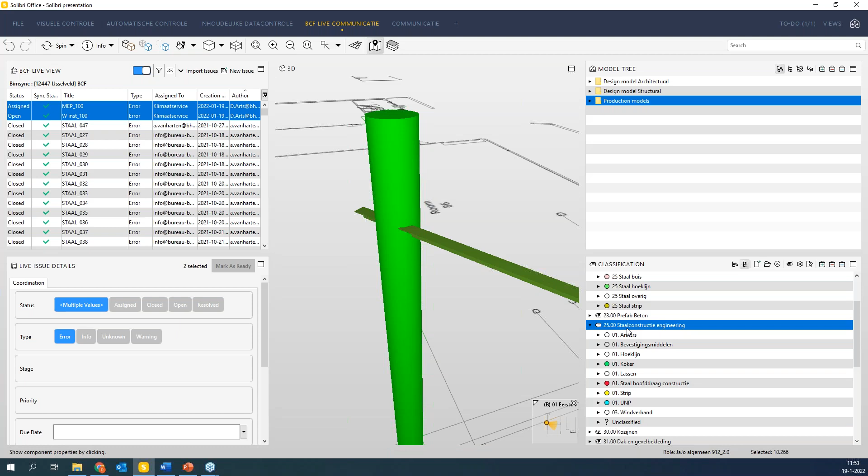Do you add traditional drawings into the SMC model, or do you not see any benefit in using this? I mean, I definitely see benefits of doing this. Some of our guys are doing this daily. I myself am more of a 3D person. I don't really use it personally, but yes, in our company there's definitely some guys who are importing PDFs into this drawing and seeing it. What we prefer is, and you see that here now, it says room 86 and 88.

We're now educating our modelers to do this a little bit differently, so that we can actually literally see better room names and numbers. We created some data for that. So I'm trying to reduce the use of doing that. But yeah, I still see an advantage of doing it. Yes, we do. Great, thank you.

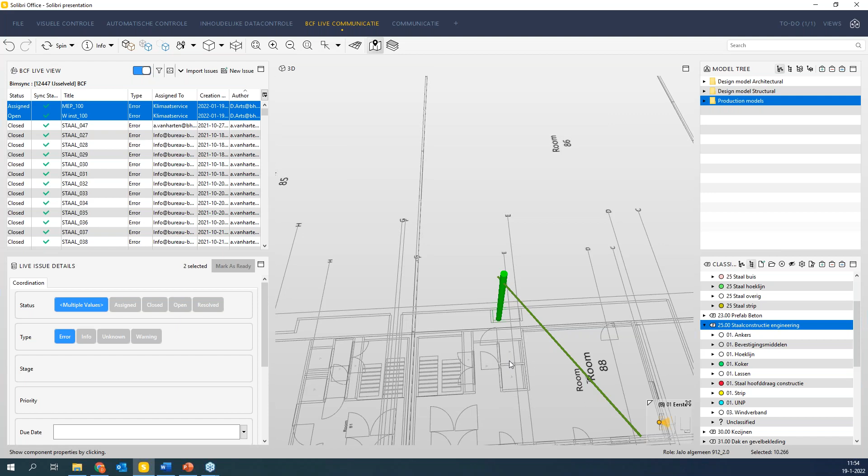Is your BCF able to be modified to match local authorities' requirements? Interesting. Who's asking? What country are you from? Because I've never heard of a local requirement using BCF. So I'm very happy that a government is actually asking standards from the BCF. That will be very interesting. So where are you from? I would like to learn more about it.

There's also a similar question: are there any official rule sets issued by the government in the Netherlands, for example, for building permits? Nope. Okay, good to know. Yeah, not good, because I think there are some Scandinavian countries that are doing this, and that is good. I believe that we should do that as well here in the Netherlands. The government could easily do that, and our local governments could use these 3D checks to check proper models.

But you know, the reality is that I don't know what the percentage is, but at least half, and probably more, of the construction being done is not done using BIM. All these small projects like small houses and that kind of stuff. A lot of people don't use BIM. So, is it a wise decision for our government to demand it? Who knows?

Yeah, exactly. We have room for a couple more questions, or maybe one question. What is your strategy for checking complex projects with models larger than 1 gigabyte? I don't think we've ever received that. I think the largest BIM model we've received is about 500 MB, which was already quite stressful for our PC. So 1 gigabyte, I would ask the modeler to change that, because a model of 1 gigabyte is probably a bad idea. I would cut that model down, ask the modeler to create smaller IFCs, because it's probably not manageable.

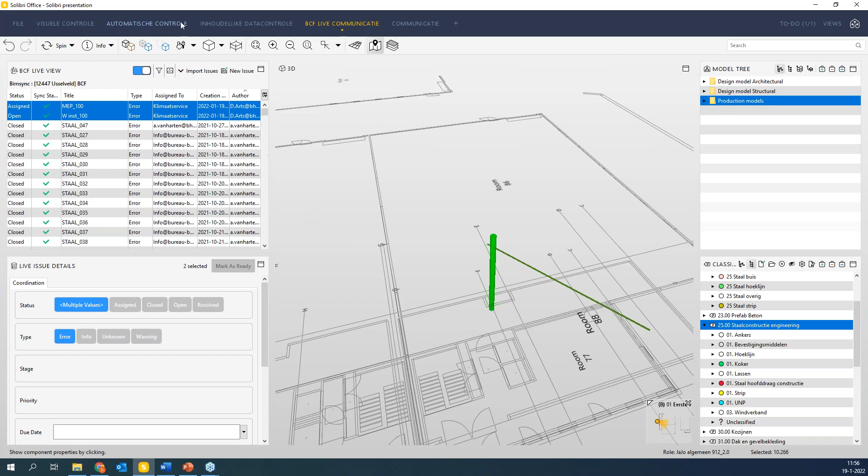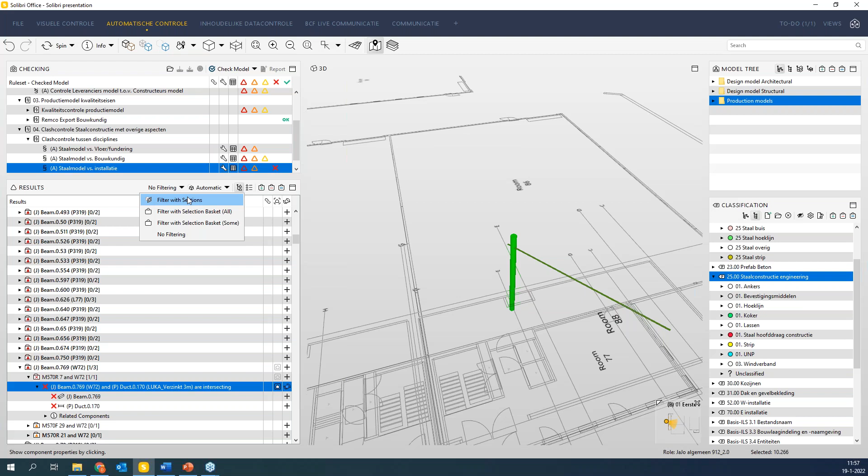That's my first idea. And if it somehow is manageable, I will definitely advise to use the filters. So I would definitely start using filters with selections. I would make it smaller. I think that's how it will work in general anyway. You need to keep things small and work from worst case scenario to it doesn't really matter, in that kind of scale. So start smart and use your filters with selections to take out the worst parts first. I think that would be it. Great, thank you, Daan.

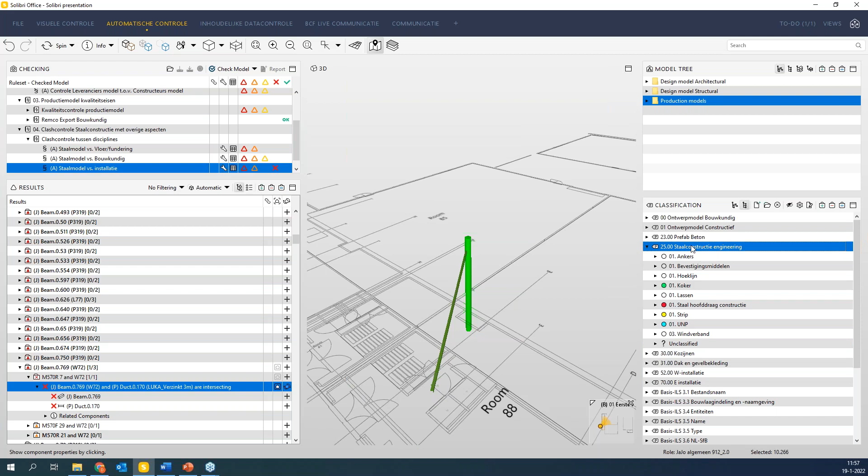One more question. Do you always do the classification manually, or is it automated? No, it's fully automated. These classifications are set, and we have a lot more. They are automatically loaded into a new project, and they don't need to be adjusted. They will only need to be adjusted if there is a new supplier and it doesn't fit into our classification. One of our experts will then receive a message, change the classification, load that up to our server, and the next time somebody asks for this classification, it will be set straight away automatically. Because manually is really a bad idea. It's not manageable, and again, you need expert users to do this properly.